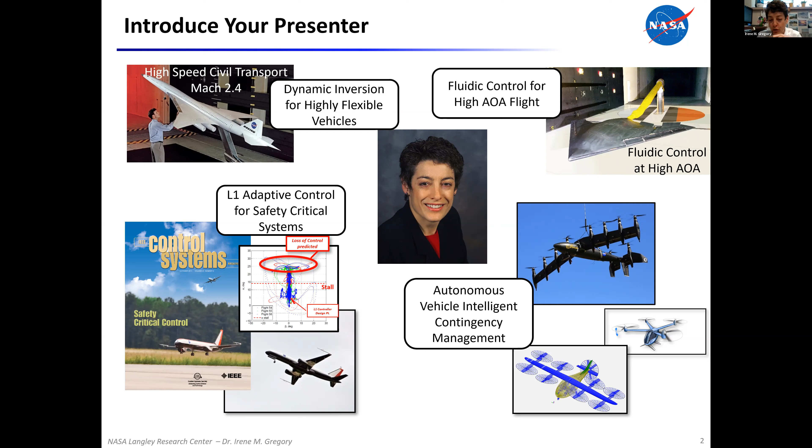Very briefly, I've had an opportunity to work on a number of very interesting projects in my career. Pictures of some of them you see on this slide. Because of just the number and variety of experiences, there's a few things I've learned during my career, and I'd like to share with you some of those lessons learned.

The control field itself is a vast field. Discipline in flight control has been going on since the Wright brothers in 1903, so it's way too much information to give you even a glimpse of what's out there. What I would like to do today is give you the fundamentals and essentials that will help you design systems to enable the flight of some of the new configurations that you're all developing.

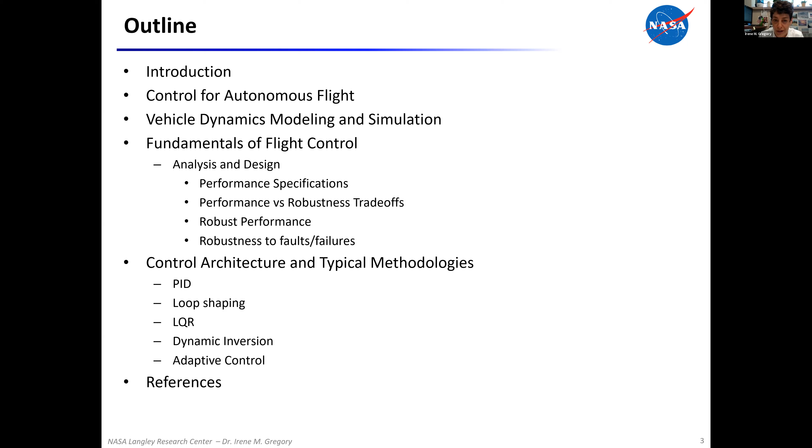So briefly, we're going to give an introduction to what constitutes control of autonomous flight. Then we're going to talk about the importance of vehicle dynamics, some fundamentals of flight control, both analysis and design. I'm going to provide you just a few typical control methodologies that were used for flight, and then I'm going to leave you with a slide of references that should give you a really good starting point of where to go as you need to learn more in order to actually design control systems.

So without further ado, when we say controls, it actually is more than just moving surfaces on the vehicle. Controls entails the entire vehicle management system. You have to do it, whether it's autonomous flight or piloted flight of some sort. You need to be able to do pre-flight system diagnostics, trajectory planning, mission management that incorporates sensor data, assesses the vehicle's capabilities, makes decisions about its mission. You have to be able to deal with contingencies in an intelligent way, guidance, navigation, and finally trajectory following control.

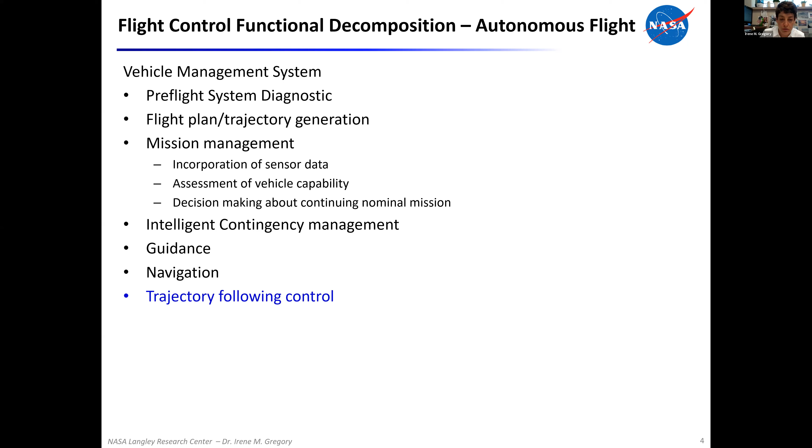So I'm going to focus strictly on the trajectory following control today. And so what is control? Well, the term actually has many meanings and often varies between different communities. We're going to define control as the use of algorithms and feedback in engineered systems to alter system behavior. Feedback happens to be a basic mechanism by which all systems, whether they're mechanical, electrical, or biological, tend to maintain their equilibrium. Something like feedback and control is very intuitive, but again, for flight, there's some lessons to be learned. And at its core, it's an information science because we use information, both its analog form of sensors and its digital representation in computers.

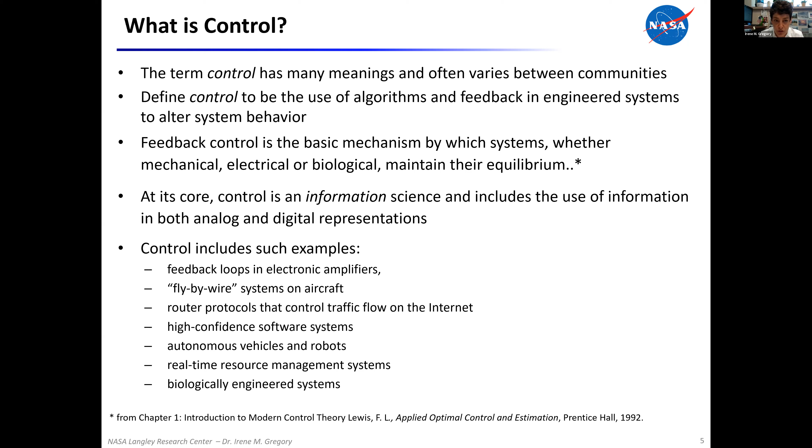Examples include things like feedback loops in electronic amplifiers, fly-by-wire systems in aircraft, router protocols to control internet traffic, autonomous vehicles and robots. As I said, it is a very large field and I can't do it justice in 45 minutes, but we'll try to at least give you some basic lessons learned.

So what is a control system? Well, a modern controller tends to sense the operation of a system. It compares that against a desired behavior that you specify, and then it computes some corrective actions based on the model of the system that you have and its response to some external inputs. And then, of course, you actuate the system to effect the desired change.

So in a sense, the basic feedback loop that we've talked about is sensing, computation, and actuation. The key issue in designing controls is to make sure that the system is stable, and stable just means for any bounded disturbance, you have some bounded error. And that in addition, the system has some desired behaviors, such as you want some good disturbance attenuation.

So in fact, if you have wind, you don't want the vehicle to grow in its response to the wind, you want it to attenuate that response. You want to be able to respond fast to any commands you give to the system. And there are others.

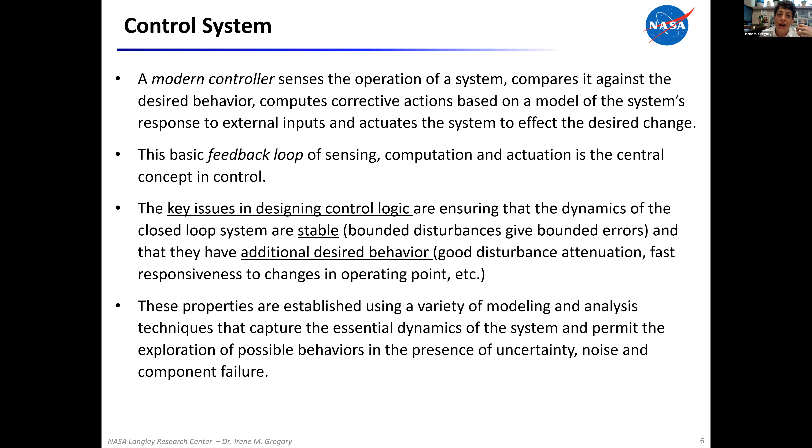So these properties are established in a variety of modeling and analysis techniques. As I said, it's a very large field. But there are certain things that are in common regardless of what technique you use, and they're just fundamental good practices. So one of the things that is absolutely paramount in order to design, and not only design, but more importantly, analyze the behavior of any vehicle system you're going to build, is to be able to do vehicle dynamic modeling and then simulation. You need to model the system so you can understand and then control its behavior.

So what if I don't have a model, but I can still fly it? There's a number of people who have flown vehicles. Well, the problem is that you can fly it only in a very narrow range. Whatever it is that you can do at this point, what you do not know is where would the system go unstable, or if that instability is controllable.

So any external input, any external disturbance, or any input made by the pilot can result potentially in catastrophic failure. So you do need models of your system, not to tell you that it works, which is important, but to tell you where things start going haywire.

So how can you determine vehicle dynamics? Well, there are traditional methods. You can go to the wind tunnel, you can do computational experiments such as CFD. You can start even doing a little bit of envelope expansion, identify your system. But at the end of the day, you really do need to determine your vehicle dynamics over the envelope that you're going to fly. And then through flight test, you validate whether your model is close to what you think it is. And if not, you need to correct.

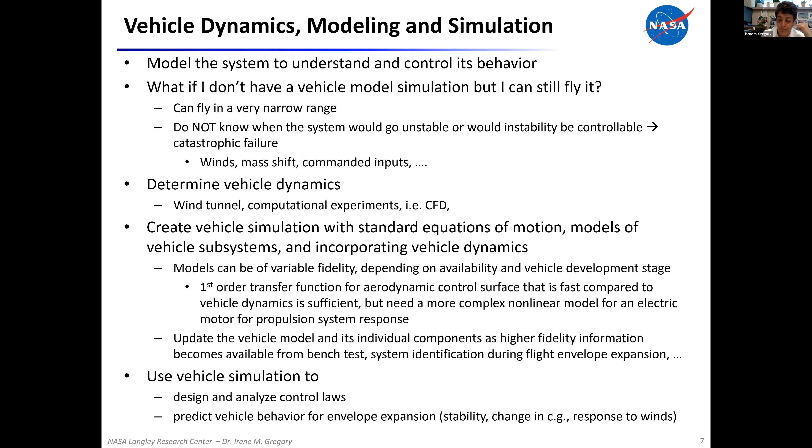All right, so let's go back to just focus on control. So I mentioned feedback several times. Why feedback? Well, if you have a controller and you have a system and you have some reference, if you know your system perfectly, then you can design your controller open loop that will, for any command signal, provide appropriate actuation. The system will follow that signal perfectly.

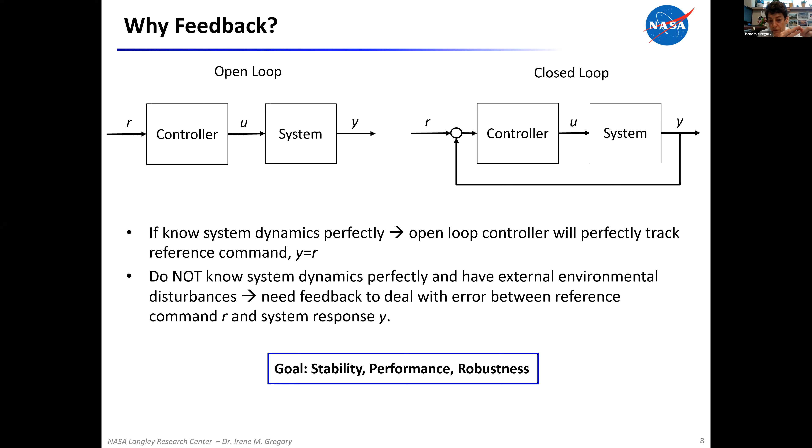However, we do not know the system dynamics perfectly. And we have some external environmental disturbances, which means you need feedback to deal with that error between whatever it is that you're commanding and whatever it is that you need your system to respond. So hence comes feedback. And the goal of this feedback is stability, performance, and robustness. We'll cover those in future slides.

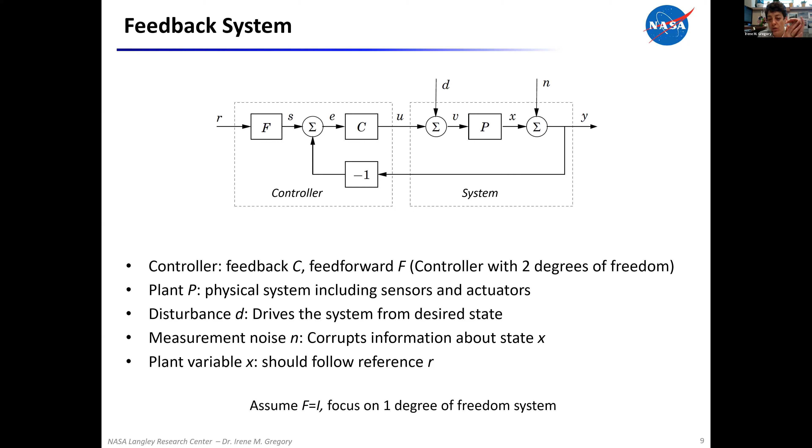Now, the nice thing is actually the decomposition between F and C in practice is very doable. You typically design your feedback system with your controller C for all the properties that you want. And then you can design your F, your feed forward, to shape the response. And as I said, that comes with experience and that adds a little bit extra complexity. And so we're going to leave that out for the purposes of this conversation.

So let's talk about properties of feedback. Well, one of the most important properties is its robustness to uncertainty. As I said before, we don't know our system perfectly, so we'll have some uncertainty. So our controller somehow has to deal with that uncertainty. Generally, feedback allows a system to be insensitive both to external disturbances like wind or turbulence and to variations of individual elements. Again, it's uncertainty of your system dynamics.

It's something can change. For instance, your center of gravity can change. Your center of pressure can change. Those all introduce variations in your system dynamics. The goal of your feedback is that you become insensitive to those variations.

The other aspect of feedback is that you can design the dynamics of your system. So for instance, if your system as designed does not behave in a manner that you would like it to behave, then through feedback, you can change those dynamics. Of course, there's limits to everything, but again, that is one of the properties of feedback, is allowing you to change the dynamics. There's, of course, no free lunch.

There's a trade-off. There's potential disadvantages. Feedback can actually cause a stable system to go unstable. It can introduce unwanted noise into the system. Remember we said there's always noise in your sensors. Well, through feedback, we can potentially amplify that noise.

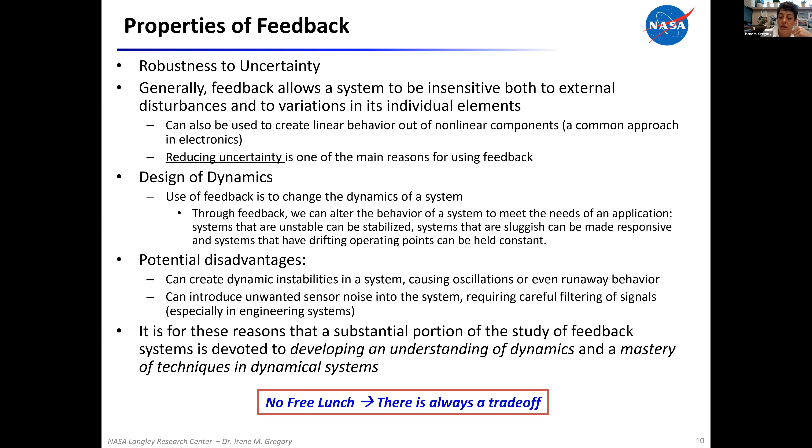So for all of these reasons, of both advantages and disadvantages, a substantial portion of our study of feedback systems is actually devoted to developing understanding of the dynamics and the mastery of techniques of dynamical systems. Hence, let me circle back on why I said that vehicle models are so important, because you are trying to study its dynamics. And the one message to keep in mind through the rest of the talk: there's no free lunch. There's always going to be a trade-off between different quantities and qualities that we're trying to impact.

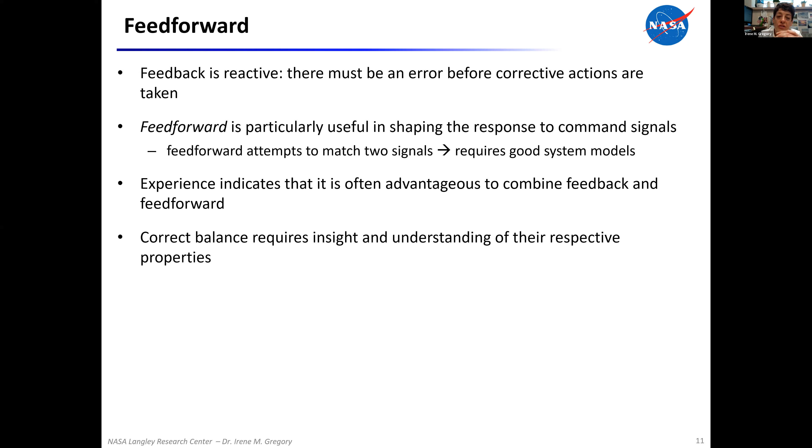So as I said, feed forward very briefly. Why is it something you need to keep in the back of your head? And if you're going to do this, go to literature to figure out how to do this right. Feed forward is useful in shaping the command signal, but it requires good system models. So that's what the feedback is doing. It's giving you that system model that then feed forward can use.

So let's talk about now controller design. So what are the criteria? Well, there's a general procedure. So we're going to design controller C, remember it's our feedback controller, in order to achieve low sensitivity to some disturbances. We want low sensitivity and small injection of measurement noise. We want high robustness to system variations, which means uncertainty and variability in plant dynamics. And then we would design, if it was a 2 degree of freedom controller, we would design F to achieve that desired response.

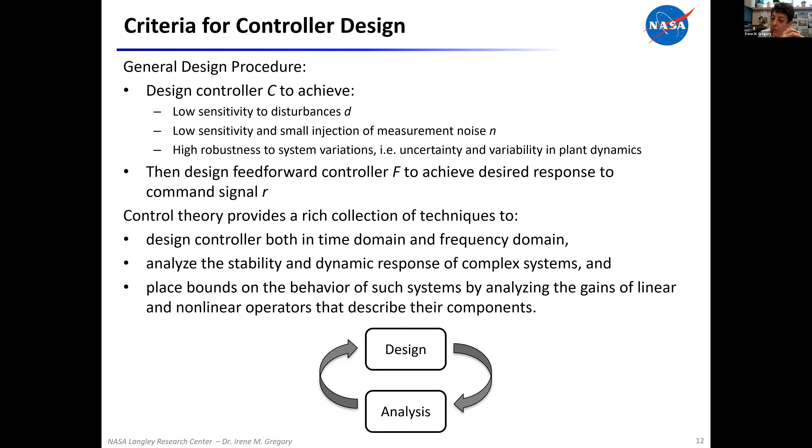Control theory itself is a formal science, with at least 60 years of theory associated with it. In general, control theory provides a rich collection of techniques to design a controller. These techniques exist in both time domain and frequency domain, to analyze stability and dynamic response of complex systems, and to place bounds on their behavior. We do that by analyzing gains of linear and nonlinear operators. So design and analysis is very much an iterative process: you design a controller, you analyze it, and typically it's not perfect in reflecting the behavior you want, so you go back to design.

The three goals of controller design, confirmed through analysis, are: first, stability, meaning bounded inputs produce bounded outputs. Second, performance, meaning you want some desired response, which you can specify in frequency or in time domain. The main problem with performance is disturbance rejection and command following. And then there's robustness, which means how do I keep both stability and performance in the presence of unknown dynamics, checking stability in the presence of uncertainty.

I need to check that stability for a set of systems, because uncertainty means the system can have different parameters, different CG locations for instance. Each time there's a new location, it's a different system, so you're really checking stability of a set of systems. If there's no uncertainty, there's no need for feedback, but we always have uncertainty, so there's always a need for feedback.

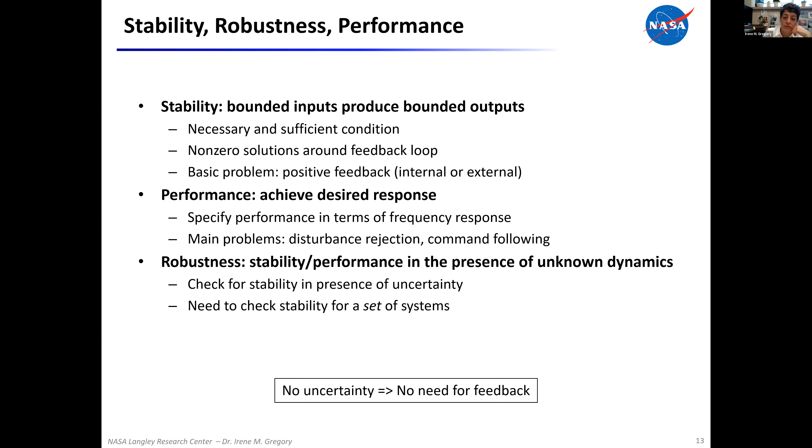If we neglect our second degree of freedom and the shaping of our reference signal, our controller F equals I. Then we have to look at the control analysis for our controller. We're going to say we have specifications. So what kind of specifications are we looking for? What are we designing for?

Typically we have specifications in time domain, because when we fly a system, we don't feel the frequency domain response, we really feel how it responds in time. We know that if we pull back on a stick, how quickly we gain the pitch angle we want, how much overshoot we get from the desired value, and how long it takes to settle to that steady state value of our desired attitude. All of these have specifications: rise time, overshoot, settling time, final steady state value, and how much error we have in gaining it.

There are very direct relationships between the time domain and the frequency domain. We're going to focus on the frequency domain, because it's a more classical way of analyzing systems, it's a little less complex, and once you understand how systems work for design and analysis in the frequency domain, it transfers nicely to time domain and more sophisticated methods.

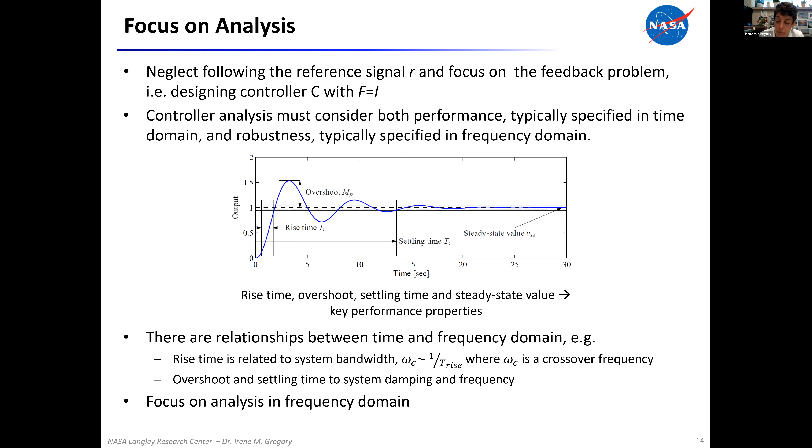In the frequency domain, this is one of the key ideas that forms the foundation of control. Until about the 1960s, all control theory primarily dealt with the frequency domain. We're going to focus on linear, single input, single output systems. If you understand those systems, there's equivalent analysis for multi-input, multi-output systems, but the basics really need to be understood in single input, single output first. The idea of frequency response is to characterize a linear time invariant system by its response to sinusoidal signals.

The idea is that for a linear system, if you inject a sinusoid of a given amplitude and frequency, what you're going to get out, if it's a stable system, is a sinusoid of the same frequency and a different amplitude. It's just going to shift in its phase.

The nice thing about frequency response is you can take a very complex system, and it's easier to see its properties in a frequency response. It's an alternate way of viewing the dynamics. It's also easier to look at sensitivity to uncertainties.

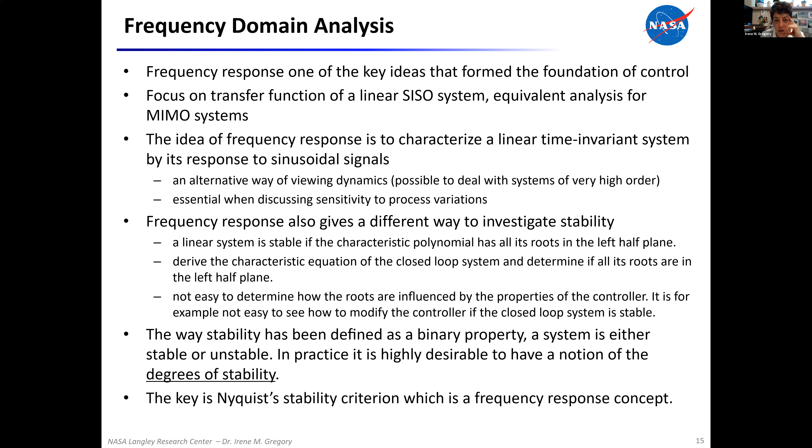So let's get back to closed loop analysis. We're going to take advantage of this idea of a transfer function. A transfer function is simply a system input-output representation that takes advantage of the Laplace transform, so we end up in a frequency domain. That simplifies a lot of our operations.

Once we have our transfer function, we're going to simulate and see what happens as we combine these transfer functions together. So if we trace the path of the signal from different inputs to the system—here we have three: the reference signal R, the disturbance D, and the noise N—to the system output Y, we end up with several transfer functions of interest.

We end up with a transfer function that describes the relationship between output Y and our reference command R. We have a transfer function describing the relationship between our disturbance and our system output, and also between our noise and the system output. If you notice, all three of these transfer functions have one thing in common: their denominator. The denominator, 1 plus P (plant) times C (control), is called the loop transfer function. All of our frequency analysis can be done in terms of this loop transfer function L.

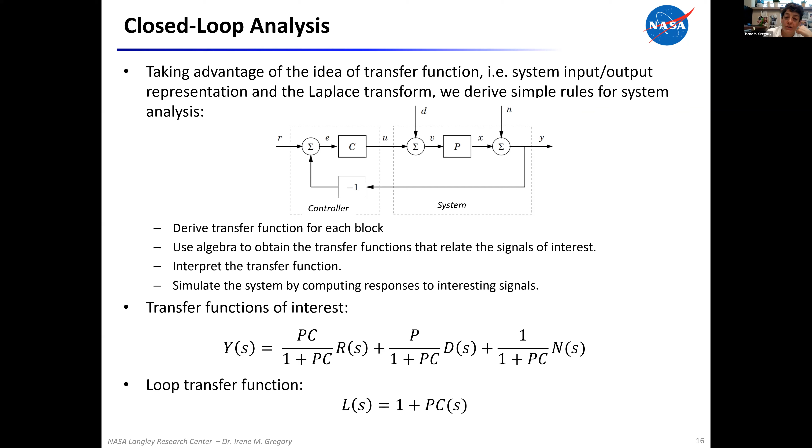So first we're going to look at stability. As I said before, we're really interested in the margins of stability, not just whether the system is stable or not. That's governed by the evolution of the loop transfer function as our frequency goes from 0 to infinity—as frequency increases, that's the evolution of the function. The stability margins are directly related to the gain and phase of this loop transfer function. So the stability margins of the entire system are related to the gain and phase of this loop transfer function.

One of the very useful representations of the frequency domain is a Bode plot. A Bode plot is done in two curves: one is gain and one is phase, and it's done on a logarithmic scale. We use a logarithmic scale because then it looks linear and we can take advantage of certain other aspects of it.

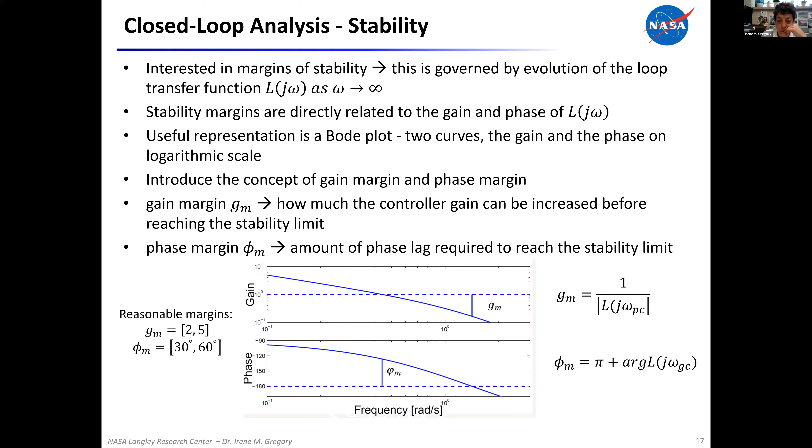So another idea that's also very important to understand the behavior of the system as a whole is this idea of a sensitivity function. The sensitivity function is simply defined as 1 over 1 plus the loop transfer function.

And there's an equivalent complementary sensitivity, which essentially is your closed loop system. That's your T, that's PC over 1 plus PC, your controller.

If we go back and look at our equation again, that gives us the system response in relation to 3 different inputs: reference command, disturbance, and noise. We note that the response to a commanded input is governed by our complementary sensitivity function. However, the response to disturbances and response to noise is governed by the sensitivity function. So if we want to be able to track commands, we care about our complementary sensitivity. And if we care about rejecting disturbances and rejecting noise, we care about the size of our sensitivity function.

Another condition that's extremely important is how well are we rejecting, or how well can we deal with the uncertainty in our plant. The relationship of delta P represents the uncertainty in our plant, the variation in our plant dynamics. And if we look at the relative magnitude of just how much uncertainty we can deal with in a plant, that ratio has to be less than 1 over the magnitude of our complementary sensitivity function.

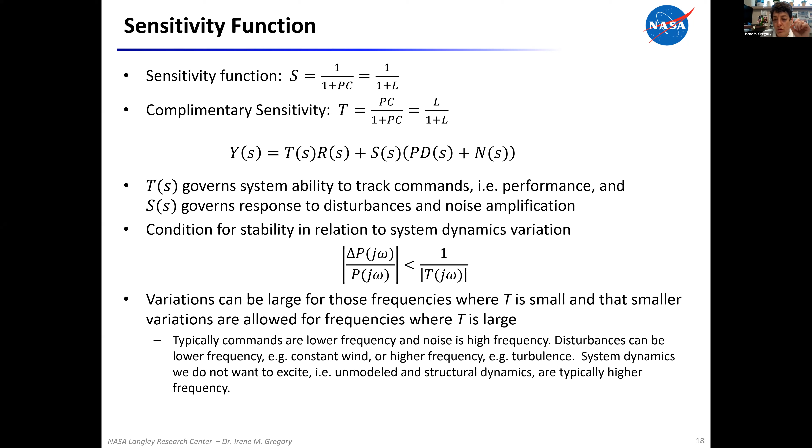So there are some constraints on the design. If we come back here for a moment: S governs the response to disturbances and noise amplification, so it's advantageous to have small values of the sensitivity function S.

And it's also advantageous to have small values of the complementary sensitivity function T to allow for large system uncertainty. However, we do have a limitation: S plus T must equal 1.

So your stability and robustness basically have to be balanced - that's your trade-off. The S and T cannot be made small simultaneously. That's where the trade-off starts coming in.

If you look at just the definition of the functions and what they'll look like in the limit, your sensitivity function S is going to be typically small for small frequencies and close to 1 for large frequencies. And your complementary sensitivity is going to be close to 1 for small frequencies, the opposite as omega goes to infinity. So there's a fundamental conservation law in controls - it's called the Bode integral. Essentially, it's a waterbed effect.

What it tells you is that the sensitivity function can decrease at one frequency at a cost of increasing at another. That means that disturbances of some frequencies can be attenuated only if disturbances of other frequencies are amplified. So you have limitations on achievable performance.

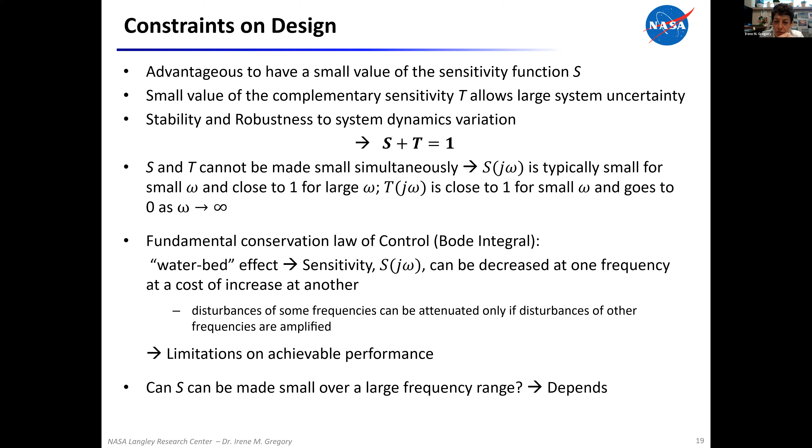Now the question is, can S be made small over a large frequency range? And of course, the usual answer is, it depends. Let's discuss what it depends on.

So what are the fundamental performance limitations? There's two things. One is how quickly can a system respond to change in your command? And two, how well can you reject your disturbances?

So some of the factors that are going to limit your performance: measurement noise, actuator saturation. How fast can your actuators respond? Because saturation can happen both in position and in rate, and your system dynamics.

For example, fast response requires a controller with high gain, which means a fast closed loop system. However, measurement noise is going to be amplified and fed into the system, which means high frequency variations in your control signal will potentially lead to saturation. So high gain for fast response will basically induce higher noise, potential control saturations, and high frequency variation in your system response. Think of dithering, which is not a good response for the system.

It can make you sick, for example, if you're flying. It's also not particularly good for your hardware, because if your control actuators are responding very rapidly, that means you're diminishing their life, regardless of whether they're hydraulic or electric. In fact, you're going to burn out your electric motors if you have this very high frequency control signal response.

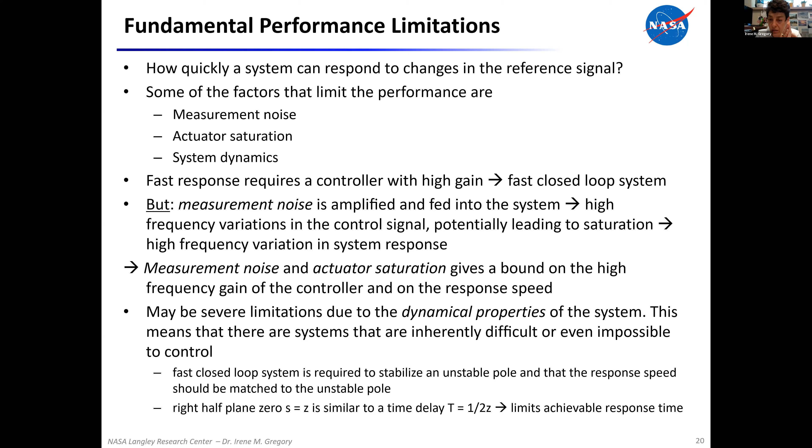And you say, okay, well, what do you mean the system is impossible to control? Well, for example, if your actuators are not fast enough to provide the required speed to stabilize your system for that unstable pole, your system is impossible to control. So you'll have to redesign the system. That's just an example of a limitation.

So, given all those limitations and the idea of sensitivities, we're now going to briefly discuss some of the typical control and design methods and some observations about them, that you'll see are either used in some controllers for UAVs or have been used throughout control for flight vehicles.

The first one is your standard proportional integral derivative control, PID. The standard version of the controller is given as three parts. The first part is your proportional gain on an error between your response and your desired behavior. Second one is integral, and the third is derivative.

So essentially, the proportional part acts on the present value of error. The integral part looks at the current, basically past error, so it looks at what happened, your history of the past. And the derivative can be interpreted as a prediction of your future error based on some linear extrapolation. So you're looking at now, past, and future.

Some practical observations: there tends to be a large initial peak in the control signal that's caused by a derivative of the reference signal. You can always introduce a weighting on your reference signal R in the proportional and derivative terms that will minimize that initial peak. The implementation of a pure derivative doesn't happen in practice—it's very noisy. Typically, the derivative is implemented filtered by a first-order low-pass filter. And since you have integral action, it's very important to have integrator anti-wind-up protection. There are many ways to tune a PID controller.

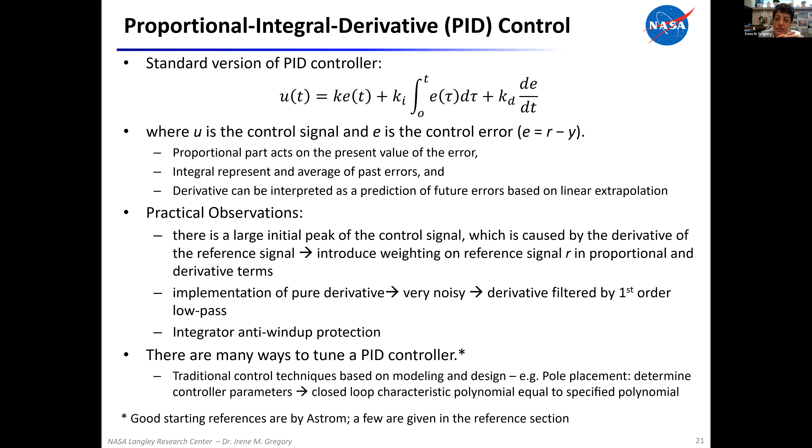Good starting references for how to tune a PID controller are provided by Astrom. This is given in the references, but if you want to do PID control, I highly suggest that you find papers and books by Astrom.

The next step in classical control, beyond PID, is we start looking at loop shaping. Remember, frequency response allows you to deal with more complex dynamics a little bit simpler. Classical frequency response loop shaping was developed from the 1920s through about the 1950s as the way of doing things. The lead-lag controller is your standard classical controller.

The idea is that you find a controller so that the loop function has certain desired properties. Your lead compensator, as provided here with an example of lead compensators given in a frequency response on the right, is used to improve the stability margin of the system or to increase the crossover frequency, which means increasing the speed of the response. It depends on two parameters, B and N. N is always greater than 1, and the plots show what happens for different values of N. Interestingly, as N goes to infinity, this very much resembles the response of the derivative portion of PID control.

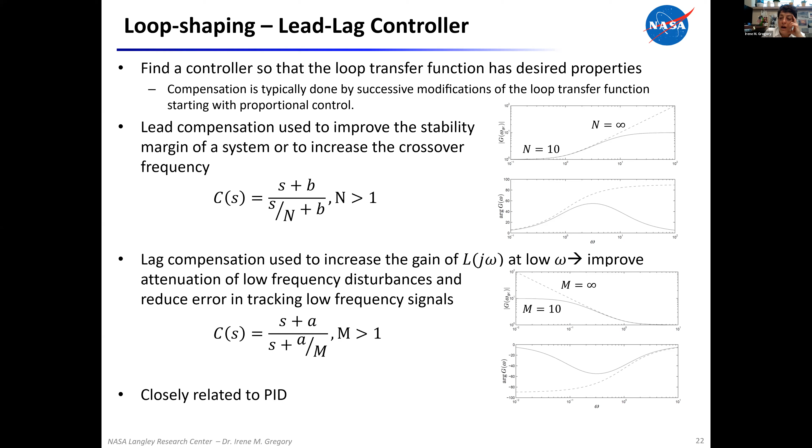The complement to a lead is a lag compensation, which is used to increase the gain of the loop transfer function at low omega. So basically, we want to improve our command following, which also implies we're going to improve our attenuation of low-frequency disturbances and reduce our tracking error. Something very similar is shown on the right: what happens as this parameter M increases, and when M goes to infinity, this very much looks like the integral action of PID. So this is closely related to PID. We're going to very quickly switch to the next one.

Starting about the 1960s, control theorists started looking into a different system representation: system dynamics modeled in state space form as opposed to frequency response. So instead of a transfer function, you're now looking at state space form, given as x dot equals A x plus B u, where B is your control effectiveness matrix, and Y is your output—in this case, simply Y equals X. So we have full state feedback.

For linear feedback, the control signal U is given as some negative gain K on your state X, and some gain on your command signal, resulting in a closed loop system, as you see there. Now, if we're interested in getting control of that system...

One of the most used methods is something called linear quadratic regulator, LQR, sometimes referred to as LQ. Essentially, we're bringing the idea of optimal control and marrying it with flight control, and what it's doing is trying to minimize the performance index. It happens to be quadratic, and it's trying to minimize it along all possible trajectories of the system, which has implications for system stability. So essentially we're optimizing, or trying to minimize and balance between our states X and our control U, with certain conditions on the weighting matrices.

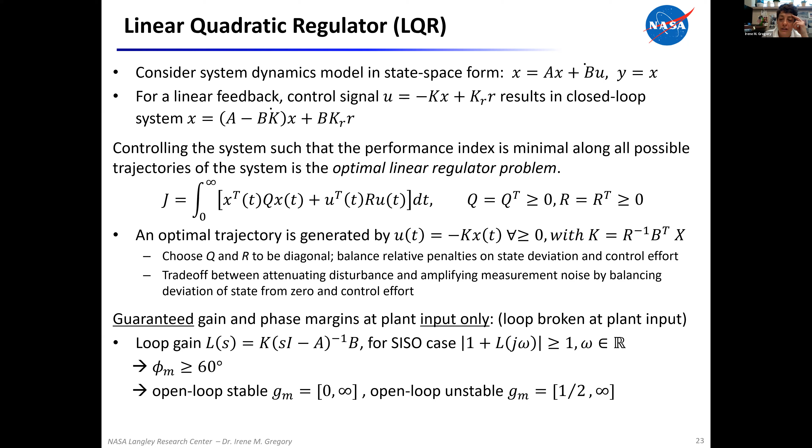Another widely used technique in flight control is something called dynamic inversion, or in some textbooks referred to more generally as feedback linearization. It's popular because, for the previous methods we talked about, those were all linear systems, so you have your plant, you have to linearize it, then design controllers. In this case, we have nonlinear systems. We still need a model, but we can essentially invert that model and then use a single linear controller across the entire flight envelope, so no gain scheduling.

In some respects, dynamic inversion is a special case of model following control. The issues with dynamic inversion: it requires exact knowledge of your model dynamics to achieve good performance, so robustness is really a key issue since we don't know our model completely. And even if we can invert the model, we're only approximating, so our model plus our actual aircraft dynamics only ideally approximate an integrator, and only within the bandwidth of the actuators.

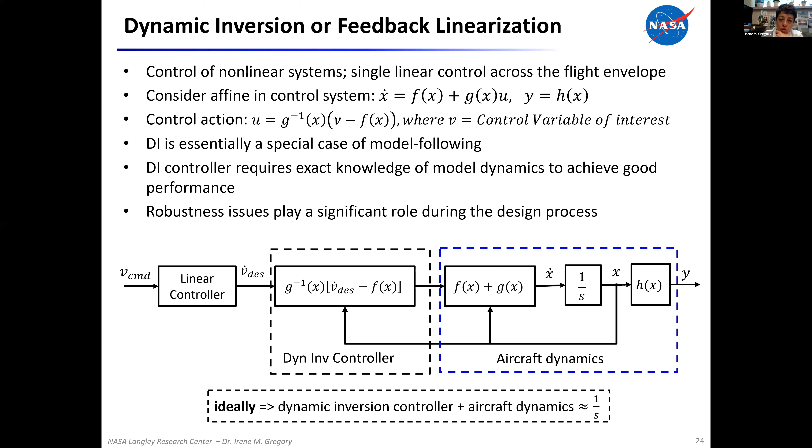But if we design our linear controller astutely, and that's the term that's been used in literature by people who've done this successfully, then we actually will have good robustness and good performance. And I'm providing some references in the back to give you a better idea of just what all of this does if you choose to use this formulation.

So these are all methods, and they've all been successful. However, there's another methodology that's been around for a while and has been extremely successful over the past at least 20 years. I'm going to talk about this particular methodology, but in general, I'm talking about adaptive control. Adaptive control is extremely useful in dealing with varying model parameters, but more importantly, with faults and failures, so it provides you an extra measure of robustness and safety if it's properly designed.

And I can't emphasize enough, proper design. Not all methods of adaptive control are equal. Not all methods are appropriate for flight in safety critical systems. So I'm going to give you a quick overview of one particular methodology that I've helped grow and develop, and it's L1 adaptive control.

That's something that has flown on UAVs, but more recently had several flight tests in fully manned flight vehicles with a number of faults and failures. And as I said, it's been showing itself to be very successful in flight. One of the things that it allows for, it is a robust adaptive control architecture that allows fast estimation schemes.

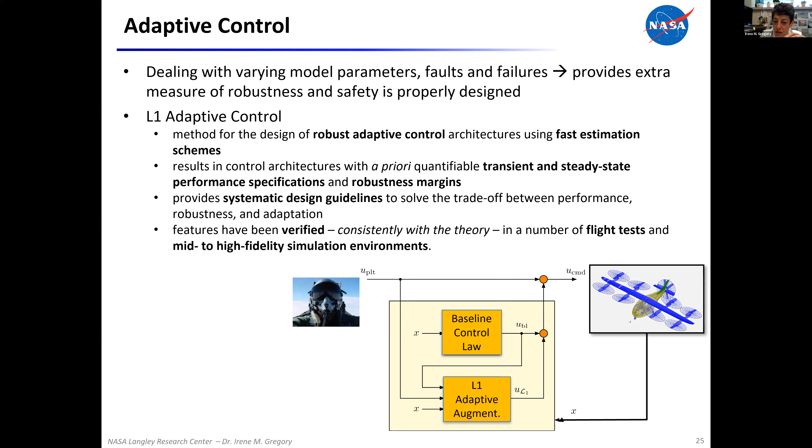And so the way we typically use adaptive is we design a robust baseline controller, and then we use adaptive as an augmentation to provide that help when things go haywire. I'm not going to go through the actual architecture other than to say there's a standard estimation loop and the control loop, and then the control signal is generated, but only within the limits of the bandwidth that your actuators can actually provide.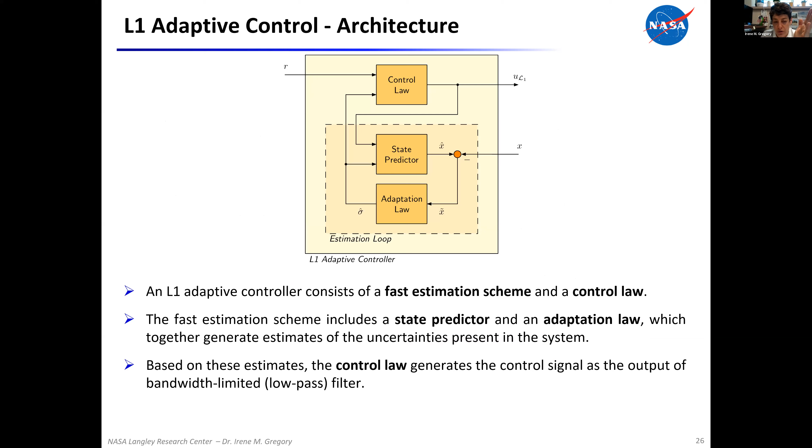So in summary, I want you to remember, if nothing else, that there's always trade-offs between performance and robustness. The design challenges for the controllers include disturbances, measurement noise, system variations, or system dynamics themselves, sensor resolution, actuators.

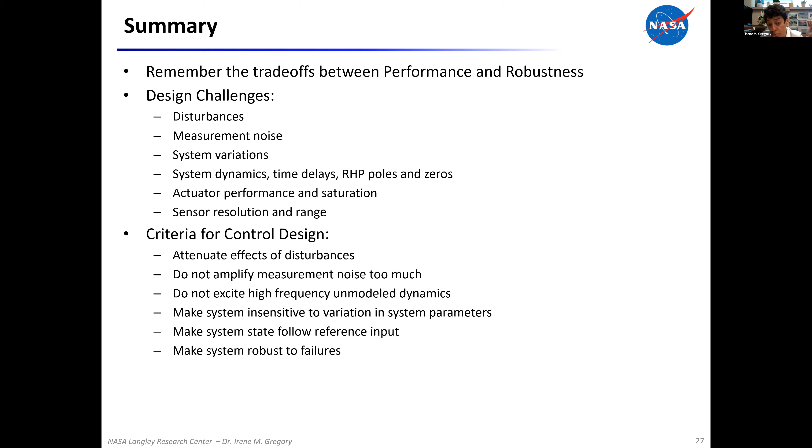The criteria for control design: remember to attenuate the effects of your disturbances. Do not amplify noise too much. Do not excite high frequency unmodeled dynamics. Make your system as insensitive as possible to variations in your system parameters and dynamics. Make your system state follow your reference input at your command, and make it robust to failures.

Thank you so much, Irene. Incredibly informative and a lot of great information and references that our teams can take back. I'm sure this is one that they're going to need to pause many times along the way to rewatch.

So some of the questions that we have coming through is, you had mentioned that we do not know our system dynamics perfectly. What is the metric for how good the model can be, or can I know in advance what is good enough? That's an excellent question.

What's good enough is something we always struggle with. Typically depends what phase of flight you're in. A lot of times, especially when we're designing vehicles for go fly, the configurations are rather unconventional, so the question of what's good enough truly is still an open question. If our configurations look more like conventional configurations, whether it's a helicopter or whether it's a standard airplane, then we have a pretty good idea of how close our linear models are to our real models, just because of similarity of configurations, and that's available in literature. For some of the new ones, we really don't know.